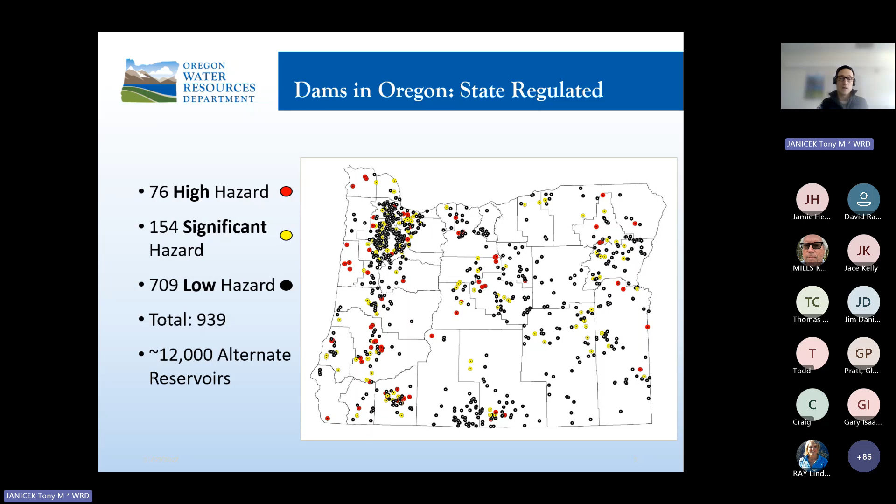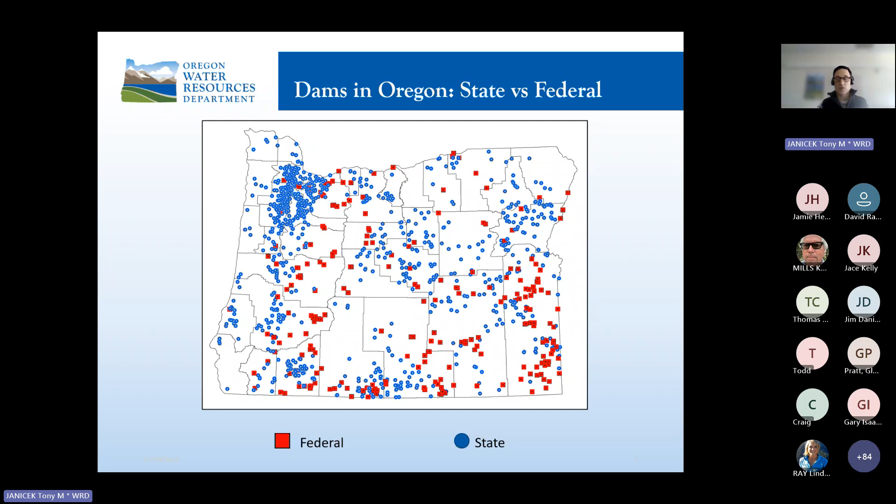This image, the map, shows the distribution of state versus federal dams in Oregon.

The dam safety program has 6 core functions. We inspect dams to identify safety issues, and following inspection, we follow up with an inspection letter that provides dam owners with recommended and required actions. We start out by trying to work with owners cooperatively to get those required actions completed. However, if a dam owner is unwilling to complete required actions, we have enforcement authorities that help get compliance. We also have a role in emergency planning and response.

This is largely around high hazard dams. All high hazard dams are required to have an emergency action plan, which is a document that tells what to do in an emergency, and they're also required to exercise those EAPs periodically. So we are fairly heavily involved with that. Even though significant hazard dam owners, and even to a lesser extent low hazard dam owners, aren't required to have an EAP, it is recommended that they do, just so that you're prepared in an emergency.

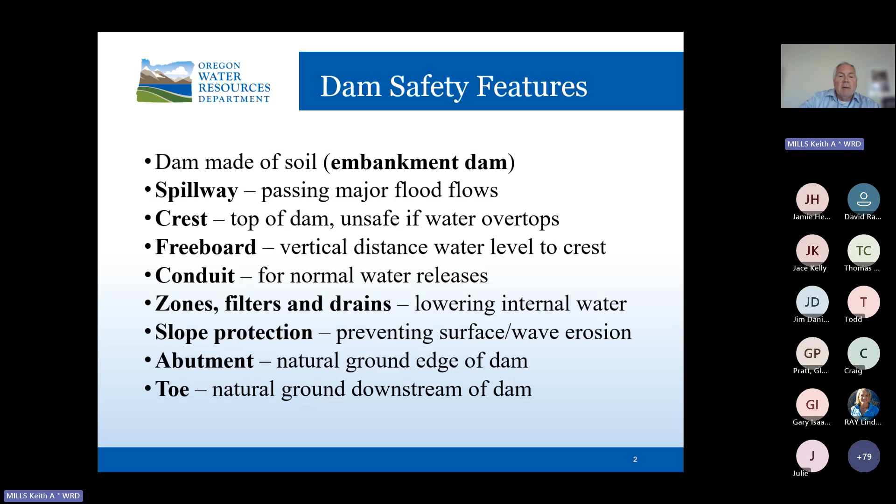I'll talk about slope protection for preventing surface and wave erosion, and show what those different options are. I'll show you the abutments of the dam, which is the natural ground edge of the dam, and the toe of the dam, which is the natural ground downstream at the base of the dam.

So here we have a dam, and I'll show you the main features. The crest of the dam is right here, and that's simply the top of the dam—it's not the top of the spillway. I once had an owner report that water was flowing over the crest of the dam, but they really meant it was just flowing over the spillway, which is a very big difference.

Here we have the abutments—they're the sides of the dam. This is one abutment, this is the other abutment. The toe of the dam is right down here. This is the downstream face of the dam, and this dam is covered with grass for its slope protection.

Then for spillways, this dam has two. It has what is sometimes called a principal spillway, which is sometimes this interior drop inlet spillway, and then there's a conduit that goes through the dam. A lot of dams do not have a principal spillway at the upper end—we do have a conduit through the base of the dam.

This is the outlet of the conduit, and then there's a valve typically on the top of the dam here, or sometimes there's a valve at the outlet works here.

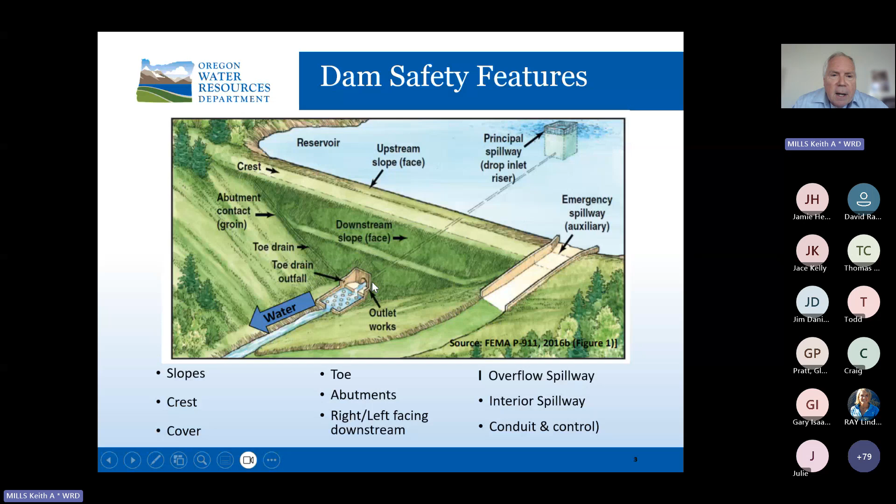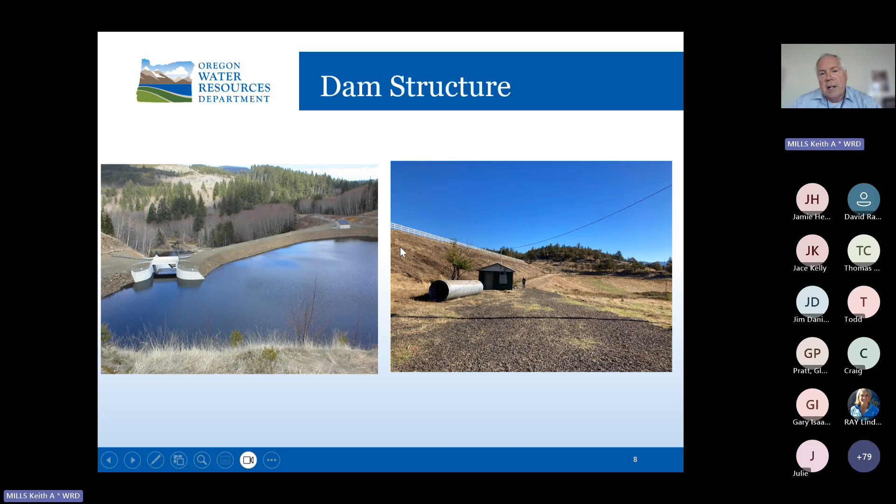This is another embankment dam that was just cleaned of vegetation. You can see the downstream face. This is their control building, where the outlet pipes are.

Now I want to get into the hazard rating of dams. Tony talked about that to introduce it, and I'll talk a little bit about why we have it -- it's based on the potential impacts from a failure flood downstream of the dam. That's very important; we're looking at what could happen if that dam fails.

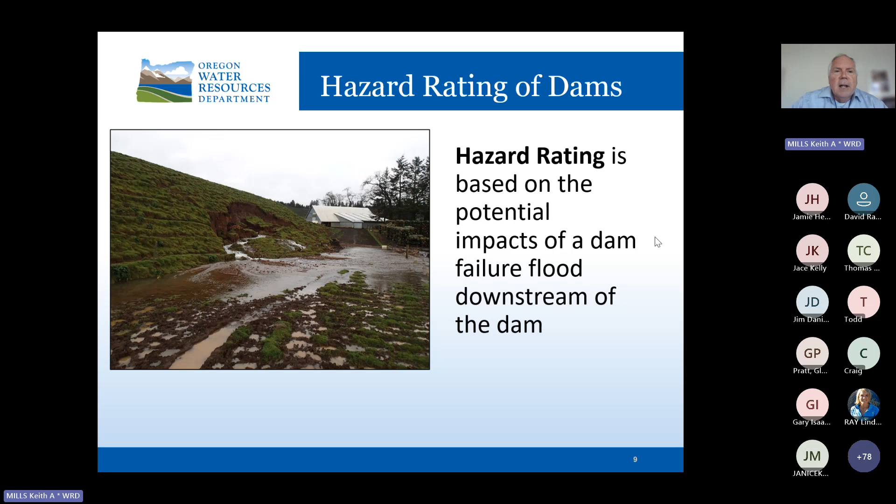Tony went over these, the hazard ratings for dams. High hazard is where we expect loss of life to occur if the dam fails, and that's defined in statute -- ORS is the statute reference, so statute is state law.

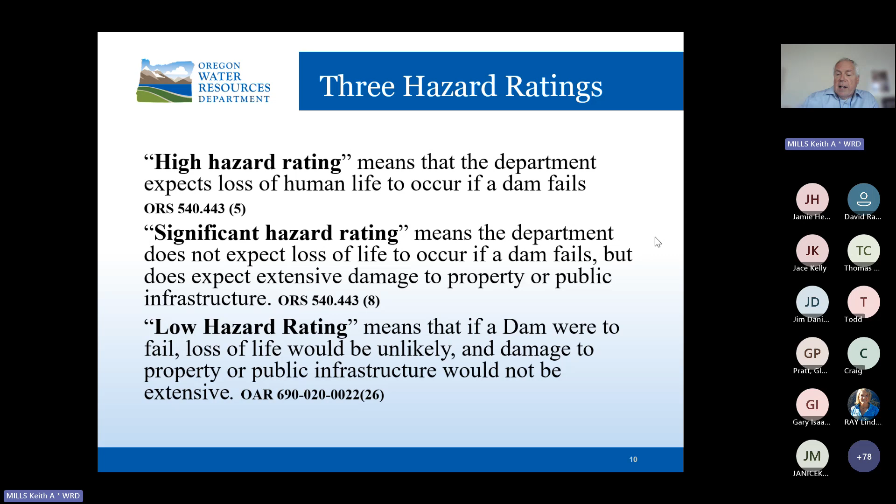Significant hazard rating means we do not expect loss of life, but we do expect extensive damage to property or public infrastructure -- that's also in law. Low hazard rating means that if the dam were to fail, loss of life would be unlikely and damage to property or public infrastructure would not be extensive. That's defined in rule, and those references are in the slide here.

So hazard is not risk -- I'll talk about risk later. Hazard, again, is what happens if the dam fails completely in a rapid failure. It refers to people, property, and public infrastructure, especially homes and busy roads.

Inundation analysis is required by rule for us to change the hazard rating of a dam, and for all new dams, the engineer working on that dam needs to submit an inundation analysis. What it is, is what's called a hydrodynamic analysis, used to determine the extent of flooding downstream of the breach, and also the depths and velocities.

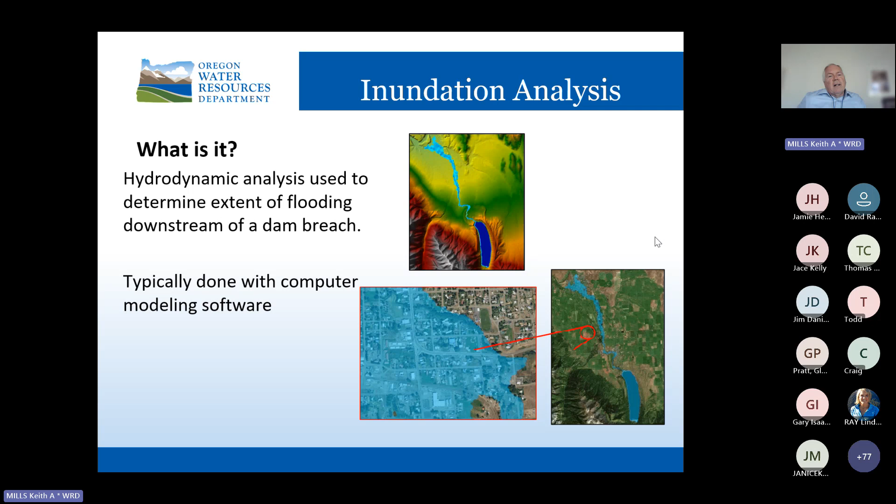It's done with pretty complicated computer modeling software. The one we use most is Corps of Engineers software. And then we get...

...maps like this, that include areas flooded shown in blue, and then flooded to 2 foot depth in the red. We look a lot at the 2 foot depth and velocity for our hazard rating change, especially for a high hazard rated dam.

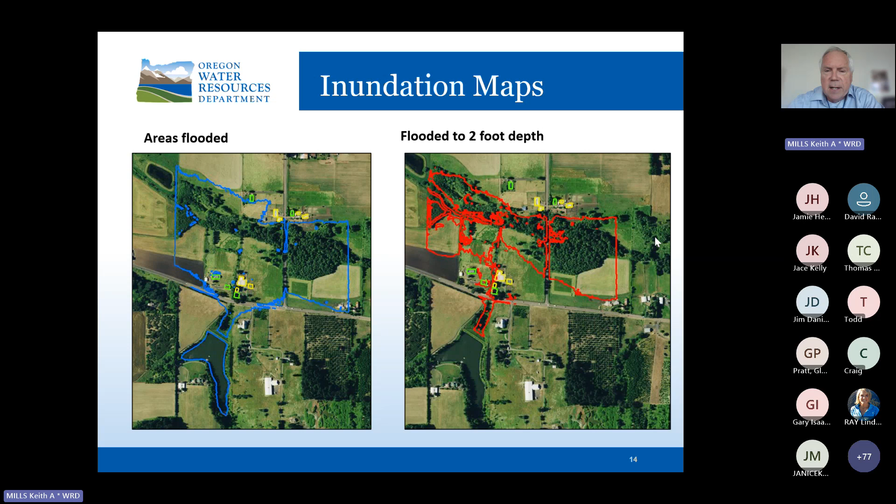What's based on hazard rating? This is important. So design standards for construction and modifications, the design flood, the design earthquake, and internal erosion prevention, the standards for each of those change based on the hazard rating of the dam.

So what's required for a new dam or for a modification of the dam will be quite different depending on the hazard rating. The inspection frequency changes too. We inspect high hazard dams every year, significant hazard every 3 years, and low hazard every 6 years.

And then for the annual fee, it's different for each of those hazard ratings. We also have a design review fee for new dams.

In terms of risk to dams in events, most dams fail in an event, and those extreme events may be floods, earthquakes, and landslides. I'll show a few of these in the next few slides.

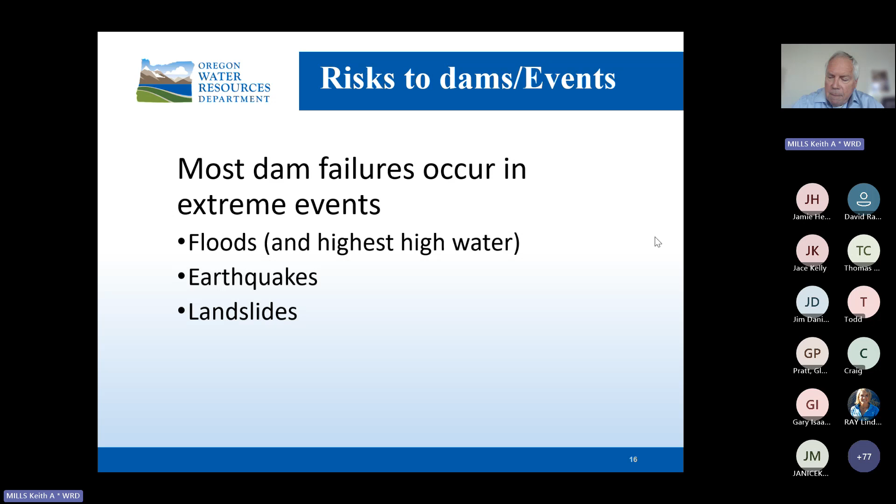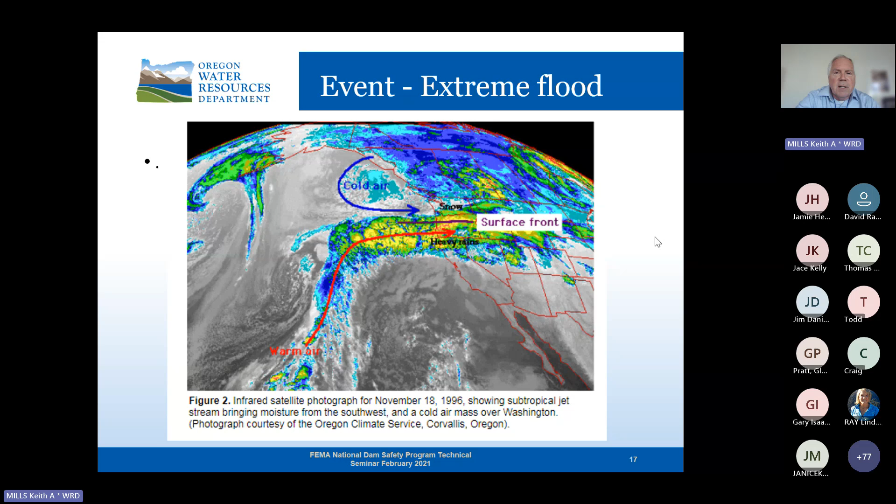So the first is an extreme flood. On this illustration, we can see the satellite image from a storm that hit Oregon in November of 1996. I was working for the Department of Forestry then, and it had very heavy impacts in Douglas and Coos counties, including a couple dams that got overtopped, but it also caused a number of landslides that had severe effects on people. So in Oregon, our largest floods have occurred in 1861 and 1903.

The 1861 storm was an atmospheric river up and down the West Coast. The 1903 event was an extreme thunderstorm. Many floods are expected during the life of the dam, and the dam needs to pass the largest flood flows without overtopping or other damage.

So again, as I talked before, the spillway is an essential safety feature. It's probably the most important safety feature on the dams, because dams made of soil fail if significant flows go over the crest of the dam.

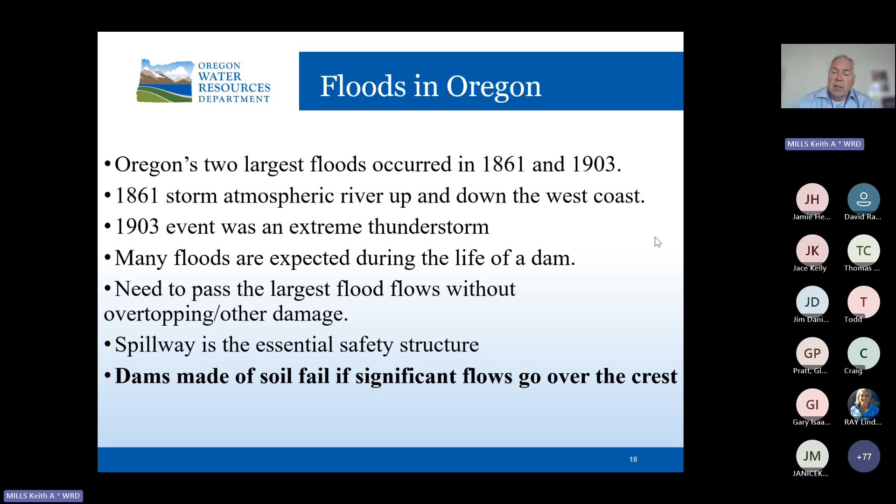This Cascadia subduction zone, when I went and got my second engineering degree in geotechnical engineering at OSU, that wasn't believed to make large earthquakes. It was thought to slip slowly all the time. Well, that's now known to be incorrect.

The last major earthquake occurred in January 1700, and there's an approximately 0.3% annual recurrence probability of this earthquake occurring. It'll be around a moment magnitude of 9. So that's our biggest concern in Oregon, but we also have a number of other smaller active faults in the Willamette Valley, around Klamath Falls, and also in Northeast Oregon.

And again, earthquakes cause different kinds of deformation in dams. So now those are the events that would cause dam failures, and now I'll talk about the actual failure causes.

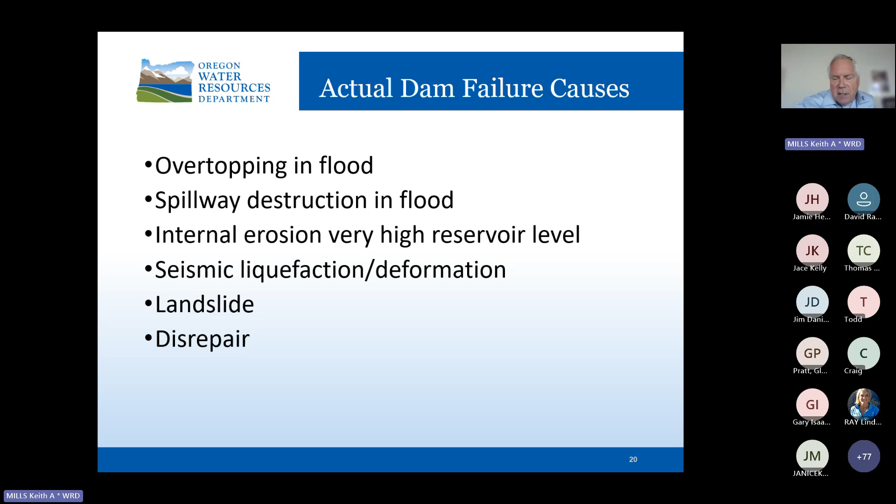The next one is landslides, and parts of Oregon are very susceptible to landslides. And the last one is disrepair of the dam. I'll just show a few examples of those.

Which was pretty amazing that this dam did not fail—sometimes luck is on your side. Then there's spillway destruction. About 7 or 8 years ago there was the Oroville Dam, which had major damage to both of its spillways due to some design issues. This is interesting because Oroville Dam is the highest dam in the United States, and it's in California, owned by the Department of Water Resources down there, but somehow they missed a few things. Luckily the dam didn't fail, but it resulted in 100,000 evacuations.

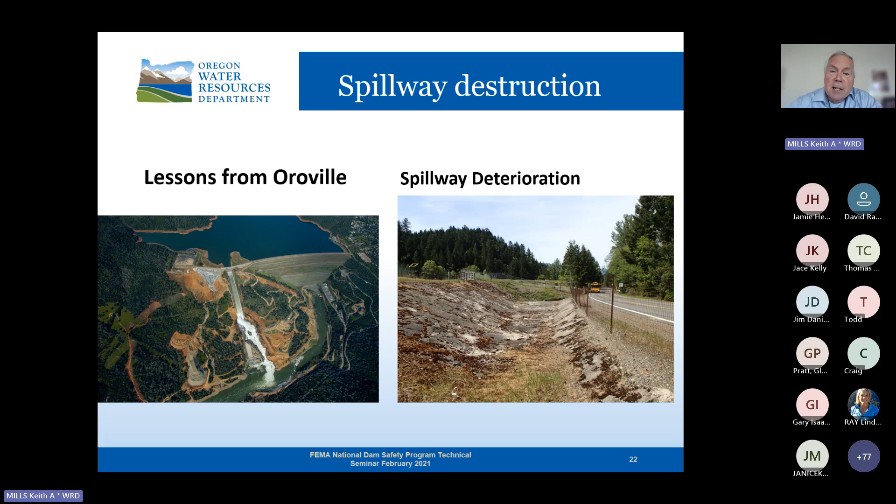And then spillway deterioration—we have a number of dams, including this one shown before, that have spillway deterioration. And then there's internal erosion. Teton Dam was the really big dam that failed in 1976 in eastern Idaho. This entire failure developed from the first seeps to the failure in 4 hours, including the rapid failure in about 15 or 20 minutes.

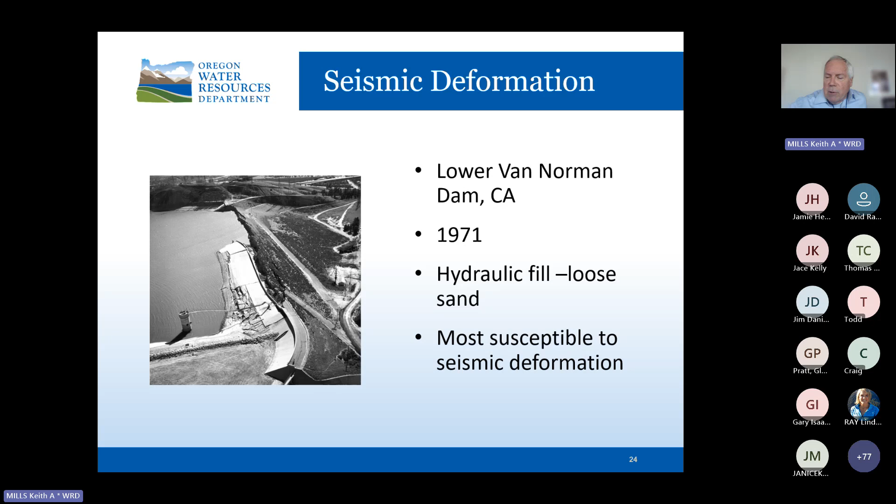And then seismic deformation. The example here is the Lower Van Norman Dam that failed like this in 1971. It didn't fully overtop, but the dam was destroyed. It was hydraulic fill with loose sands, which are most susceptible to seismic deformation.

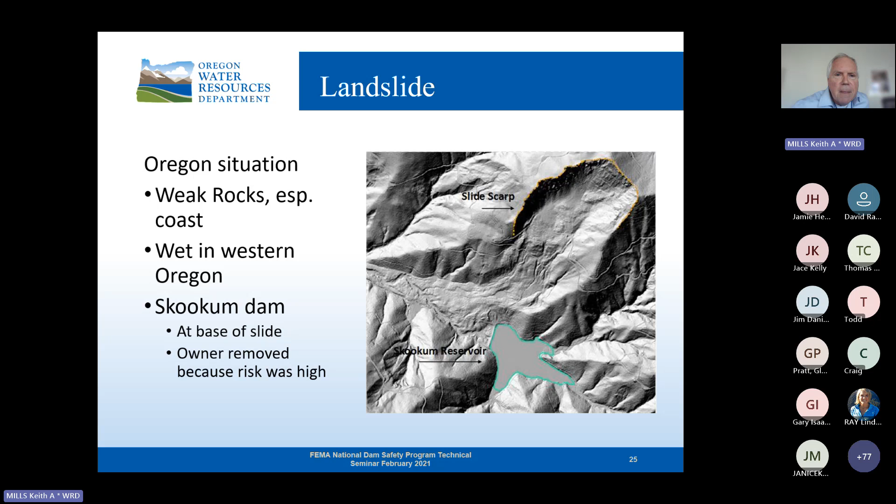So conditions that increase the risk of dams are undersized spillways, random and poorly compacted materials, corrugated metal pipes, and we did not know the Cascadia subduction zone and some other faults were active when some of these dams were built.

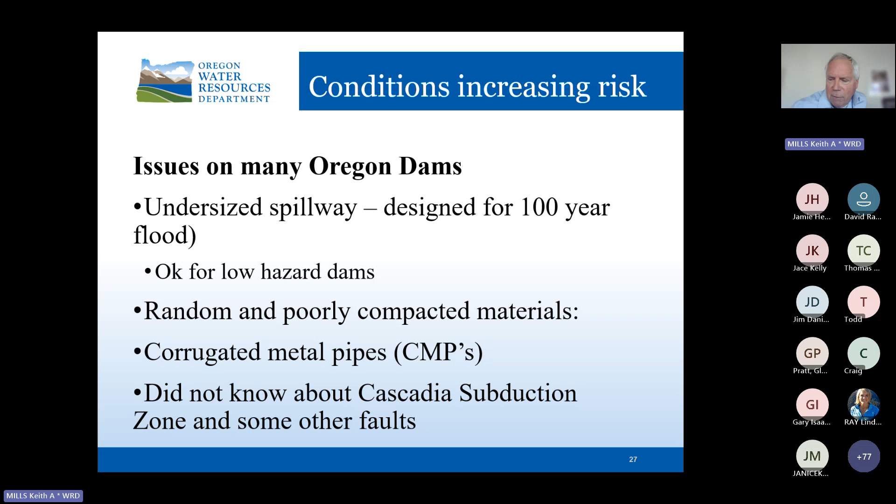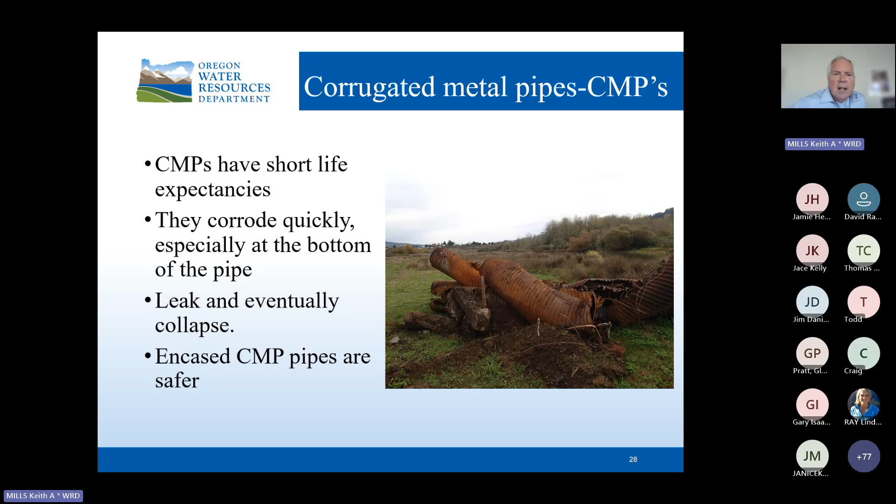Corrugated metal pipes are typically used in highways and logging roads, but they're also common in some dams. They corrode very quickly. These were pulled out of a dam—there's no bottoms in those. They leak and eventually collapse, which can increase the risk of dam failure.

We have irregular materials. This is a dam in Wheeler County near the Painted Hills, and the dam itself looks like the Painted Hills—it's actually supposed to. You can see the different colors here, and different gradations: gravel here, fine grain materials here. I'm not even sure what this is, but this was done to dig out the conduit through the dam, the corrugated metal pipe. They found that this dam had no core in it and was also irregular, so very prone to internal erosion.

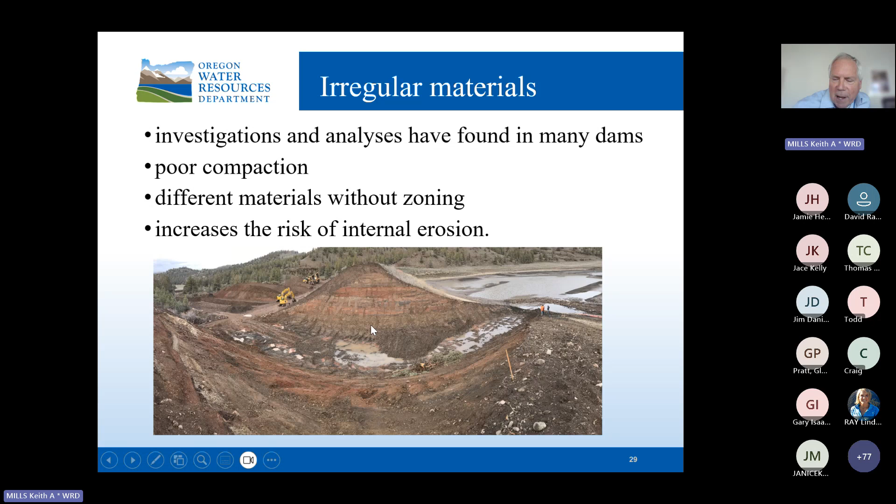One thing is that internal risk detection can be difficult, so we can't always find in our dam safety inspections what's going on in the middle of the dam. This requires, in this case, drilling through the dam. This dam was another where we found it was not constructed with the compaction indicated in the design—very soft soils in a very high seismic zone.

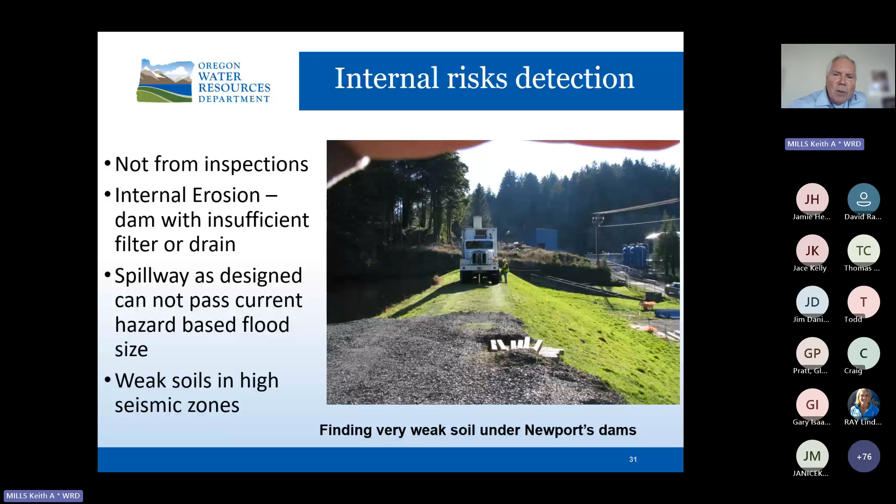Owners are working to try to find resources to replace their dams. So one option, if it's too expensive to rehabilitate and the water is not really needed, is removal of the dam.

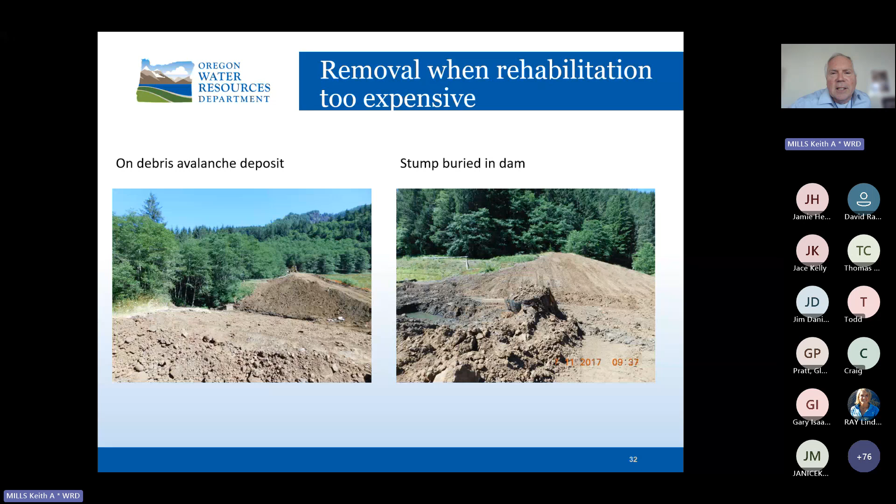And we learned a lot from removals. This is a dam in Tillamook that was removed, and this is a 6-foot diameter cedar stump that was buried in the dam. The dam had a lot of other defects that weren't shown on the drawing, so some of our dams were not constructed the way we would construct them now. But many dams in Oregon are well constructed and maintained.

So that's a brief introduction to risks of dams, and I would be happy to take any questions now.

Keith, would an overflow into a wastewater process be considered a spillway? I've got one above it too. Oh, and so I've got questions here. What kind of geotech testing was performed at the dam that was shown at Newport?

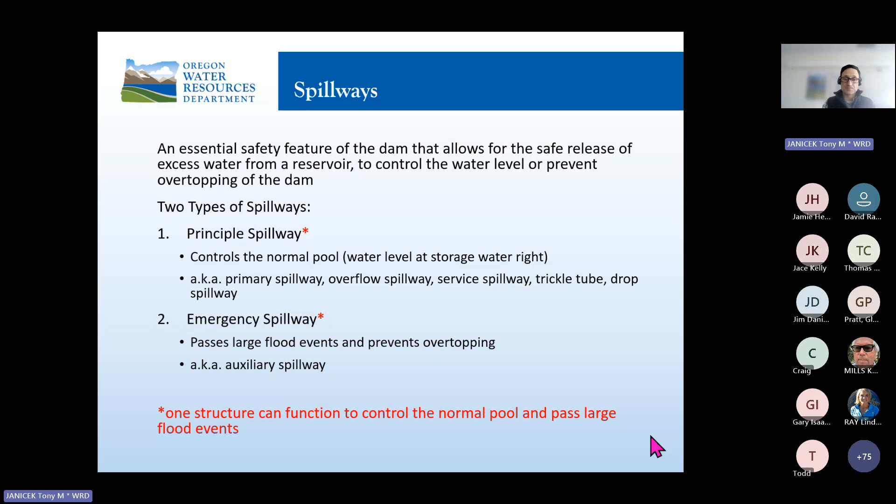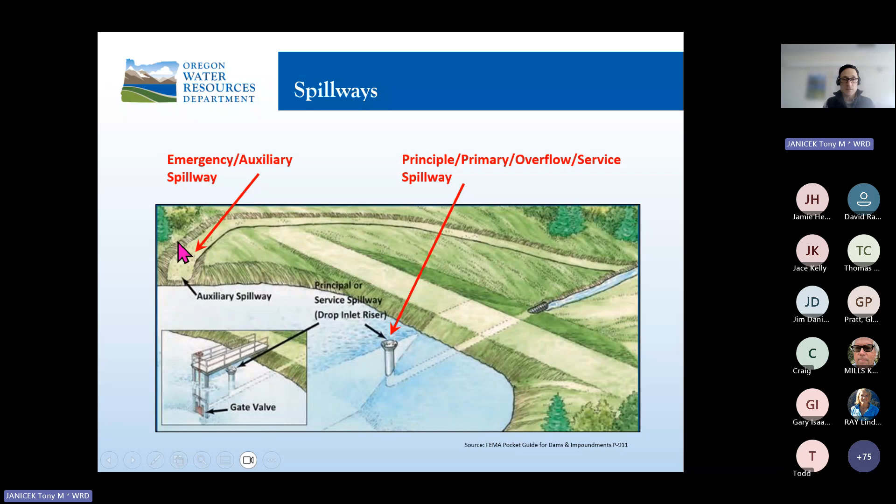This is just a configuration of the two different spillways on the dam. This is the principal spillway, and it controls the water level of the reservoir at this level. When a large flood event comes in, the water level rises and flows out the emergency spillway.

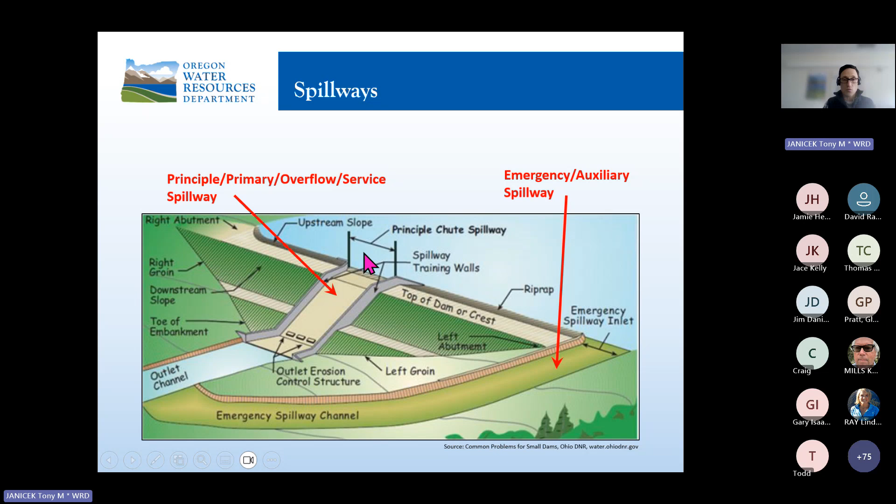This is another configuration of the two different spillways. This principal spillway goes over the top of the dam. Again, this one controls the water level, and this one releases flood water.

The control section is the part of the spillway that regulates the flow of water through the spillway. The dimensions and characteristics of the control section determine the flow rate into the spillway. Finally, the discharge is the part of the spillway that directs water away from the control section and away from the dam.

As Keith mentioned, freeboard is another important term when talking about dams and spillways. It's the distance from the water line to the crest, or top, of the dam. We have three different terms for freeboard. The normal freeboard is the distance at normal pool, so the distance at the bottom of the primary spillway, the invert of the primary.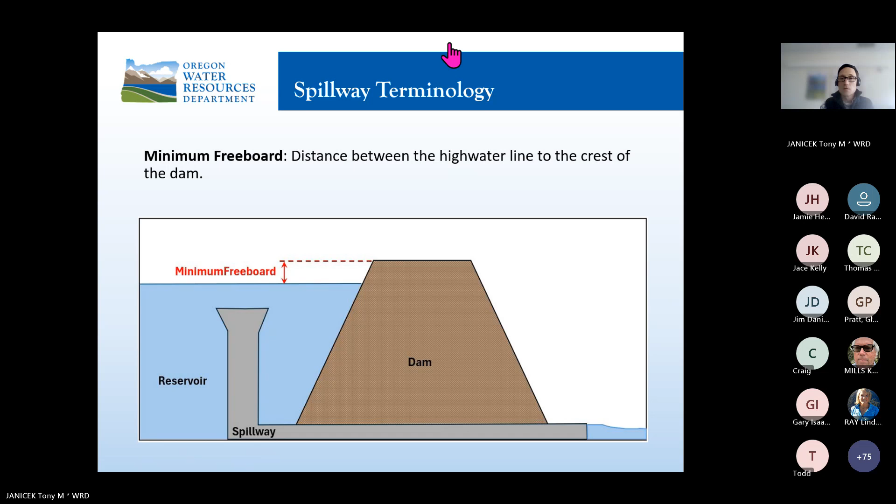Is it back? Is the audio back? Where did it cut out? Was it on this slide? Screen stopped. Let's see. Okay, we're back.

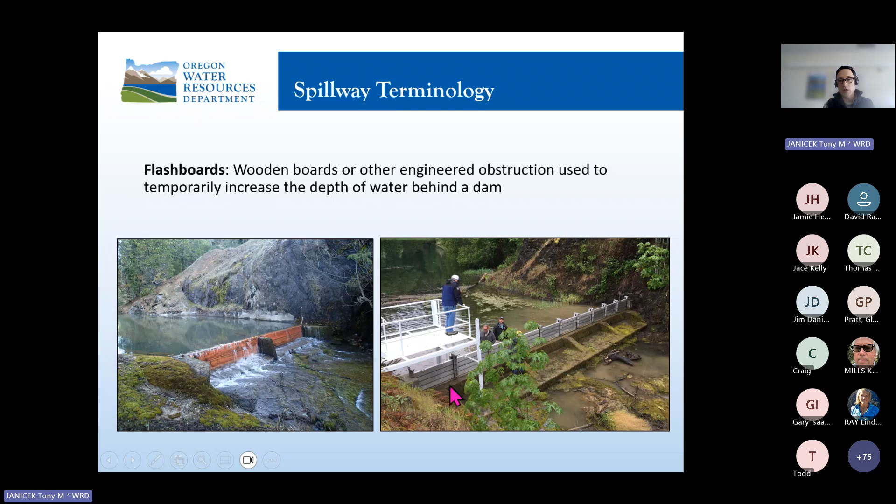As Keith mentioned, flashboards are another component of spillways. Flashboards are essentially an obstruction that temporarily increases the storage of the dam. Here, these are wooden flashboards, and you can see that with them in place, the reservoir level is higher than it would be otherwise. The picture on the right shows an engineered flashboard structure, made of metal.

Okay, on to spillway issues. A blocked spillway is any obstruction within the spillway that reduces or prevents flow through it. As mentioned, the function of the spillway is to pass large flood events, so if it's blocked, it can't do that, and the dam could overtop and fail. The cause of a blocked spillway is debris accumulation during flood events or after wildfires, or vegetation growing in the spillway.

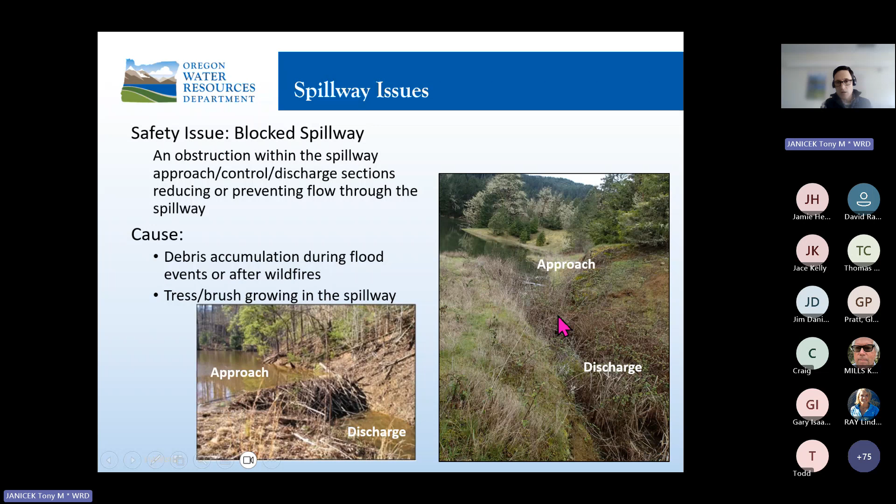The picture on the left shows a blocked spillway. The picture on the right shows a spillway filled with vegetation. It's kind of hard to tell, but here's the reservoir, and here is the discharge channel, and you can see the discharge channel is just filled with vegetation.

The other way is to just keep vegetation out of your spillway. This is a before and after picture, roughly from the same point of view of the same spillway. In the after picture you can see this well-defined spillway channel, but in this picture you can't even really tell what's going on because there's just so much vegetation.

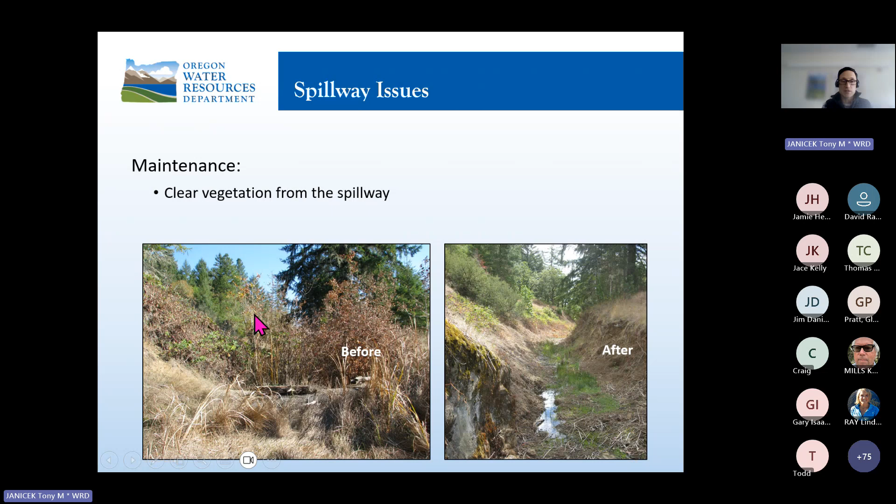Another safety issue is spillway erosion, which is degradation and damage of the discharge channel due to the force of flowing water. This is a safety issue because if erosion continues, it could eventually make its way back to the dam and cause a failure. At the very least, it would prevent you from storing water. The causes are a lack of protective cover—grass, rock, or concrete—or an obstruction in the spillway that concentrates water and facilitates erosion.

The picture on this slide shows the spillway. The point of view is standing on the dam looking down the spillway, so the water would flow from the dam in this direction, down. You can see the spillway—all sides and bottom—are eroding.

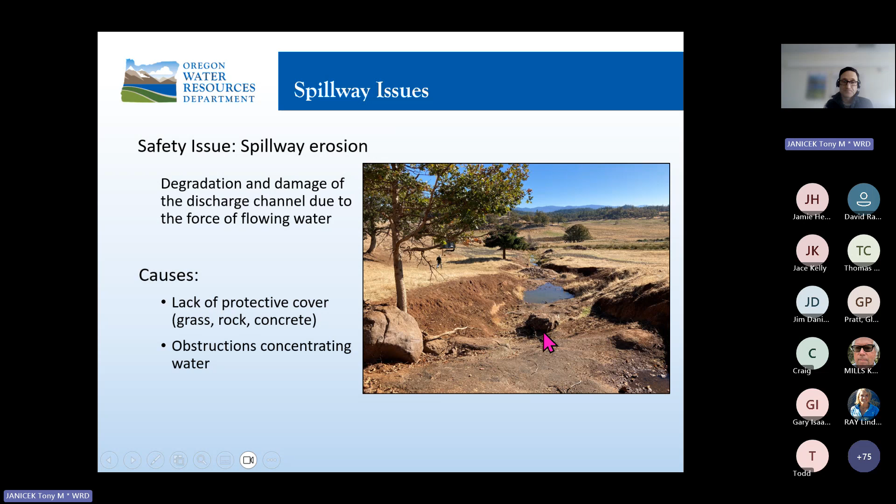On to the conduit. This was touched on a little bit, and I'm going to go into a little more detail. The conduit is an essential safety feature of the dam that allows the reservoir to be lowered in an emergency. It also allows you to release water to use it, but from a dam safety perspective, the key is that it lowers the level in an emergency.

There are two types of conduits: a low-level conduit and an intermediate-level conduit. The images here only show a low level, called that because it's at the lowest point in the reservoir. An intermediate level conduit would just be a conduit somewhere through the middle of the dam. A low level conduit is far more common than an intermediate level one.

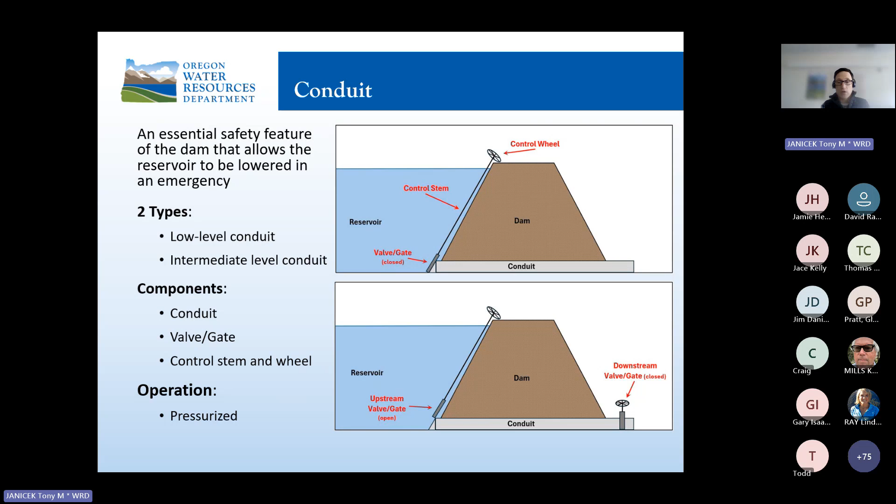Conduit safety issues: corrosion of the conduit and controls. This is largely due to age, environmental factors, and conduit material. The reason this is important is that if you don't have a functional conduit, if your gate's not working, you can't operate it to release water in an emergency. Also, if the conduit itself is corroded, as Keith showed in some photos of conduits with holes in them, that can result in internal erosion. Through those holes, water carries dam material away from the dam, and that could eventually lead to failure.

One of the most important things you can do is cycle your gate or valve annually. That means you fully open and fully close the valve or gate one time per year. It's important to note that if you haven't operated your conduit in more than a year, operating it may result in a sediment release, which could trigger a water quality violation. So if you haven't operated your conduit in more than a year and you plan to do so, you need to check with the Oregon Department of Environmental Quality to figure out the best time of year and any requirements associated with a possible sediment release.

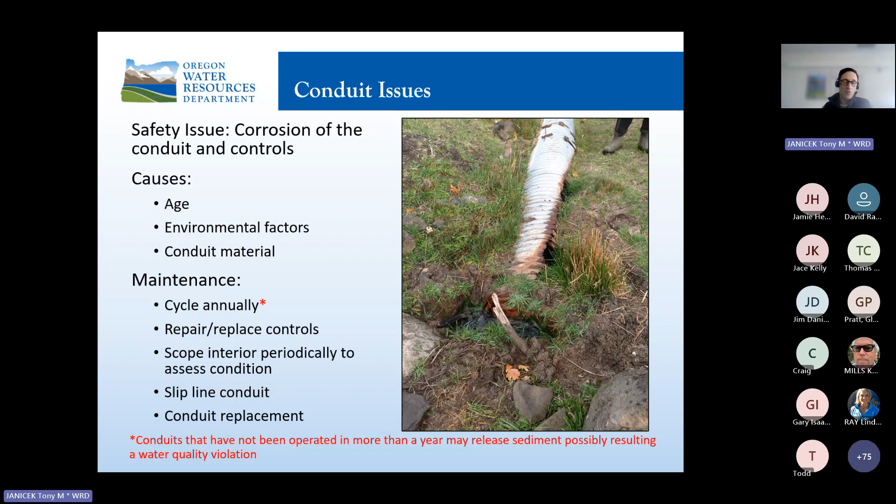Over time, because most conduits are metal, they corrode and deteriorate, and they eventually need to be repaired or replaced. For most dams, the lifespan of the conduit is somewhere between 25 and 50 years, depending on the age, environmental factors, and the type of material it is. I'll get into repair and replacement after this next slide.

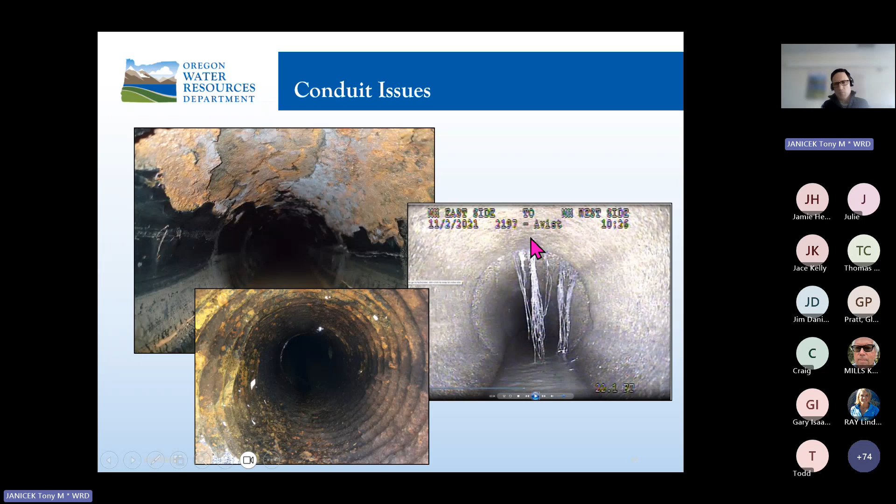These images show screenshots from different conduit scopings. You can see this appears to be a steel pipe that has corrosion here at the top. This is a corrugated metal pipe that has a lot of corrosion, and you can even see some holes here. This image shows a concrete pipe, two sections joined here at this joint. And this looks to be probably roots that are penetrating through the conduit.

As I mentioned, if you get your conduit scoped and it shows issues that need to be replaced or repaired, the repair option is called slip lining. That means a smaller pipe is stuck into the conduit and the space between them is filled in, grouted. In this image, you can see the original pipe here, and this is the new pipe being inserted into the conduit. Again, here is the original conduit, here is the new pipe that's been inserted, and this here is the space in between that has been grouted, typically with some type of cement-based material.

It's important to note that slip lining is not possible in all cases. Sometimes conduits can deform, and if they deform enough, you can't actually get another pipe inside. In other cases, the original conduit is just too small from a dam safety perspective to have another pipe inserted inside. In those cases, the conduit needs to be replaced, meaning the old one needs to be dug out and removed, a new one installed, and then the dam rebuilt.

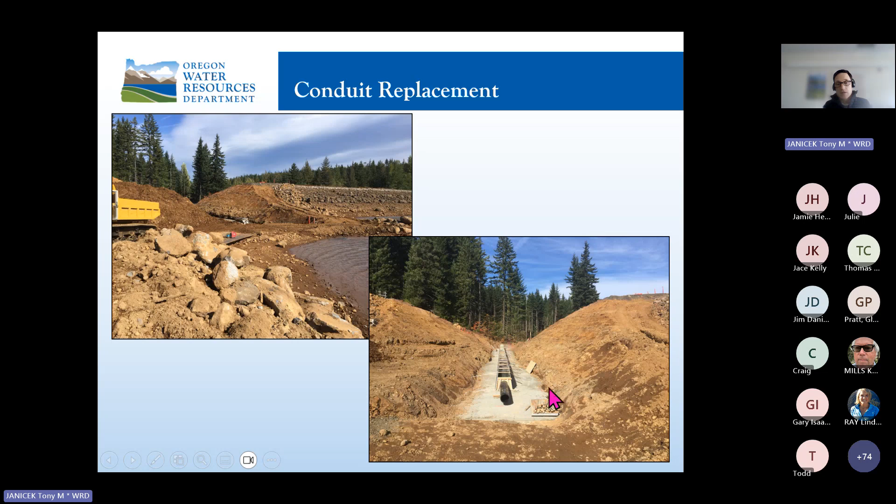Here you can see this is the dam. It extends all the way through here, and they dug out essentially a V shape, which you can see here. The old conduit was ripped out, and this is the new conduit that they're working on installing. Once they install this, they're going to build the dam back up to the original height.

Another safety issue related to conduits is erosion at the conduit outlet. This is caused by the force of water and lack of energy dissipation.

You can see here, this is just minor erosion. But all along here, material is being eroded, and over time that will get larger and begin to cut back into the dam. The dam is back this way. The reason it's a safety issue is that as it cuts back into the dam, it can cause issues with seepage, internal erosion, and stability.

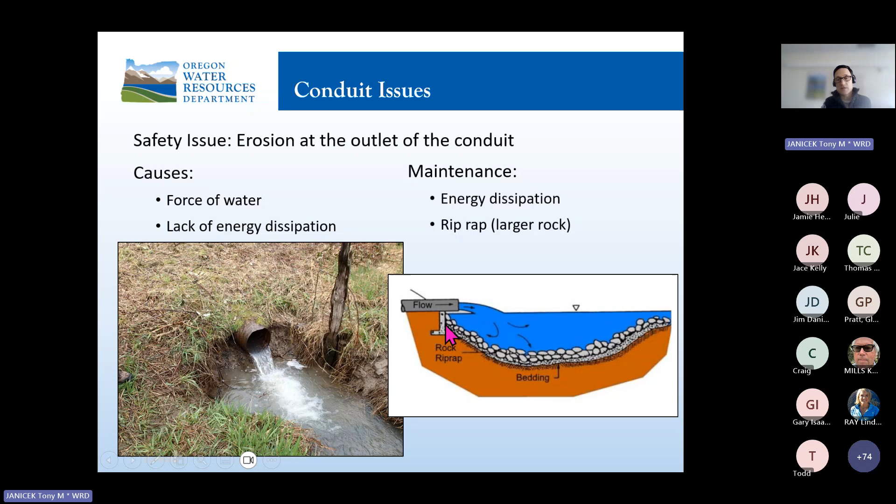So how you address that is you need to add some type of energy dissipation. Essentially that's just lining the outlet with rock. You can see in this image a small pool is created and rock is placed on the bottom, which dissipates the energy and prevents further erosion.

And with that, I'll open it up to any questions on maintenance of spillways and conduits.

Do you have a camera to inspect conduits during annual inspections? We do not currently have a camera. We plan to apply for grants at some point, probably in the next few years, to try to get one. That would be the ultimate goal. But as of now, a private company needs to be hired to do that.

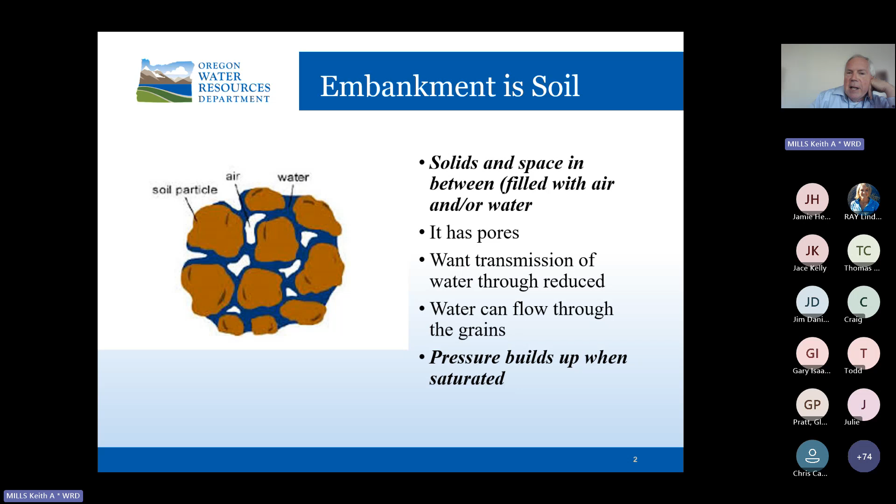What we do to make soils behave better as a dam material is to compact it. If we don't compact sufficiently, it's more prone to leakage and a higher risk of sliding - it's weaker. If it's compacted too dry, we have potential for cracking of the material and internal erosion developing through the dam. So compaction, when originally constructed, is very important.

Why this is another feature of the dam I talked about earlier is zoning. Zoning means there's different types of material used in different parts of the dam. This dam has an impervious core, finer grain, more clay-like material in the middle. Then these are what we call the shells, the upstream and downstream shell, which should be more open, better draining materials.

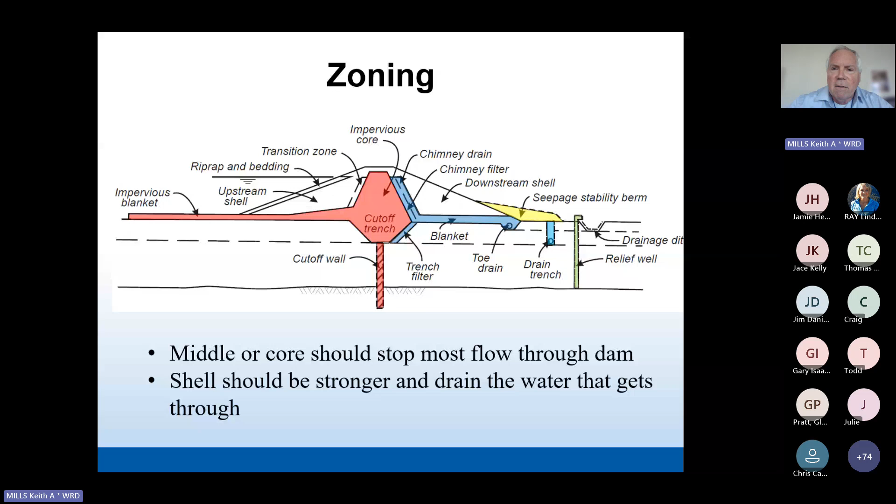On many of our dams, in fact most of our older dams, are homogeneous dams - sometimes they say they have a core. A homogeneous dam has the highest risk of internal erosion. There's no safety features for controlling internal erosion should that develop.

This is a slide from that dam in Tillamook. This dam's drawing shows that there's supposed to be a core right here. Well, there's no core that we can see. You can see a lot of cobbles in this material. Then we have a change in materials right here around the conduit and wetter materials down there. So it's more like a lot of our dams are a random fill.

When I started, I worked for the Department of Forestry for 27 years before I started working for the Water Resources Department, and I wasn't informed that some of our dams would look like an old logging road fill. So that was kind of a surprise.

We haven't seen that many internal erosion problems on some of our dams, but it does make up about half of the 50 or so failures that Oregon has seen since we've had a dam safety program. So it's pretty significant that some of our dams don't have these safety features.

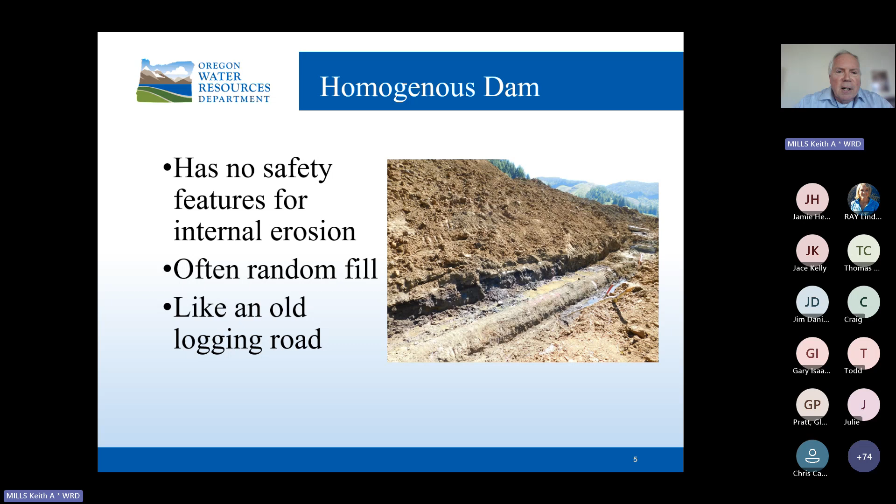So it's important to look at those pretty frequently to see there are no new seeps or other signs of internal erosion. So what is internal erosion? It's flow through or under the dam, through the soils of the dam or the foundation of the dam. Because those soils have some porosity, if they're saturated, there's water flowing through that.

That water flowing has a seepage force, and it can move particles and eventually develop a piping hole. If the material above it is strong enough to form a roof, that can progress to a pipe completely through the dam, like the Teton Dam failure and other failures. What happens for failures is that pipe enlarges and the top of the dam collapses, and then we have a failure. So we do see some signs of internal erosion that we can see during inspection.

So one is an increase in seepage with a hole, and that's the photo on the left—a dam that the owner has modified. Tony showed a picture of that dam, and it's been raised and now has a filter on it, treating where this internal erosion developing hole had developed.

The figure on the right is one of our former water masters, and she's in a sinkhole on a dam—it's up to her elbow how deep that sinkhole is. There were a few sinkholes on that dam. The owner chose to remove it; we found no easy way to repair it, and it was a high hazard dam.

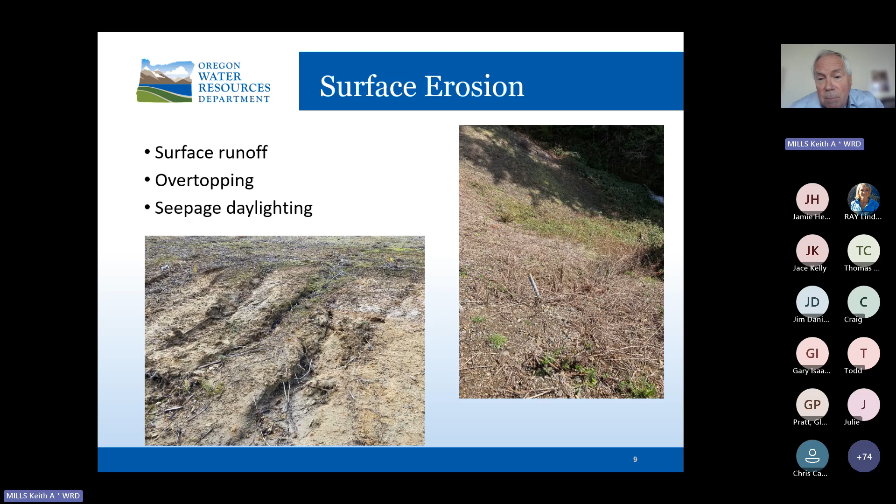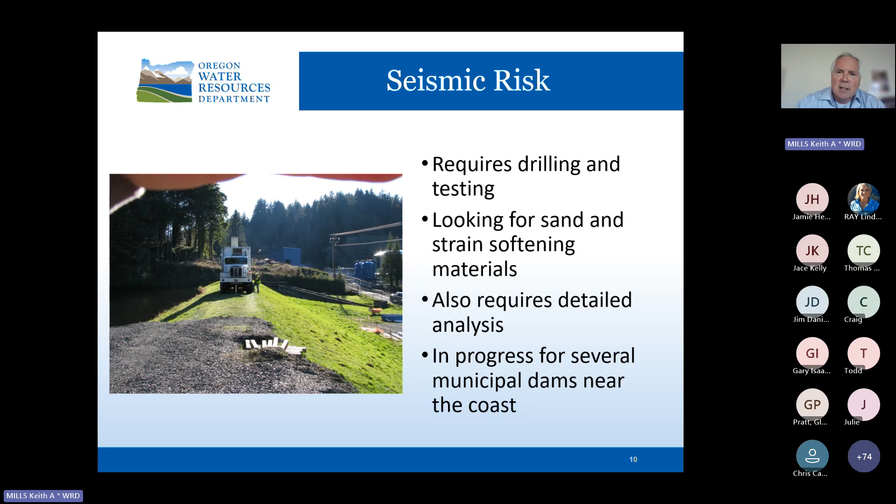I'm going to switch gears now to plants and animals and why we're concerned. Plants and animals can damage embankment dams. Western states have experienced dam failures caused mostly by animals, but a few by plants.

We've had a number of dams in Oregon that have failed due to animal burrows or dens in the dam. Dams can provide animals food and cover, so they can be a great place for animals to live if they have access, and they also provide a place for burrows and dens.

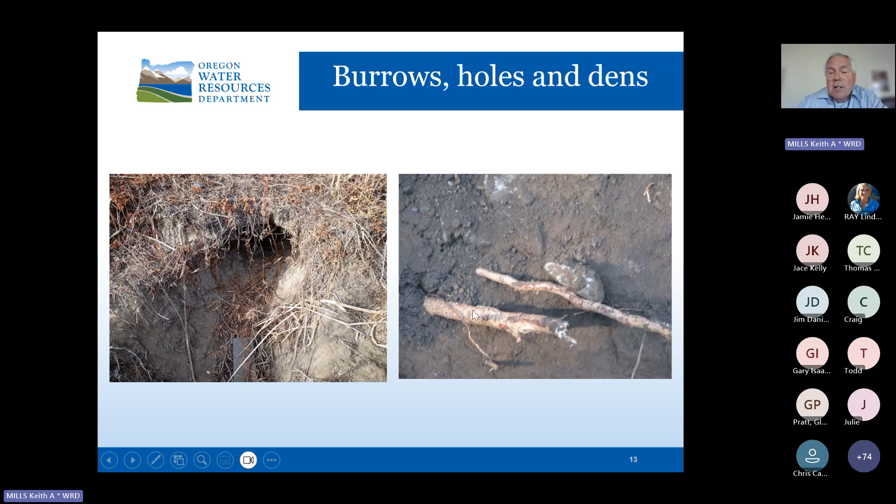We have burrows, holes, dens, and roots. Here's a big badger burrow—in this case the badgers were going after squirrels. And these are roots that are 60 feet away from a tree and 1 inch in diameter—ponderosa pine roots.

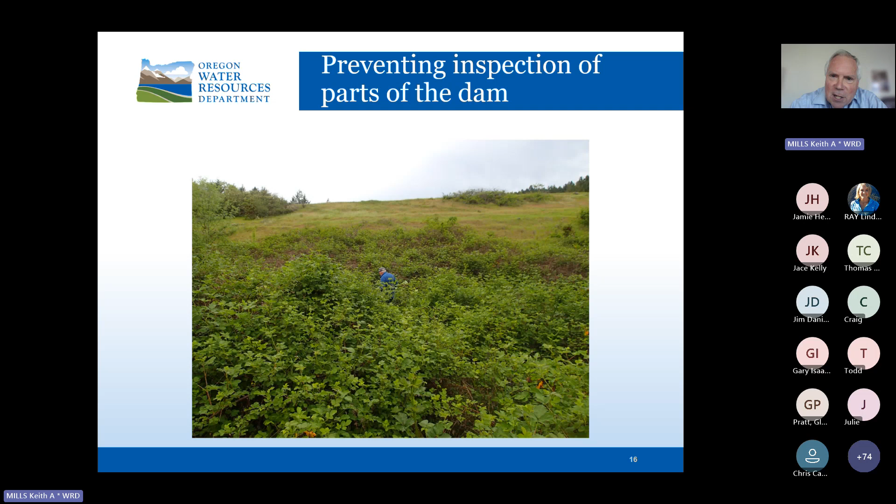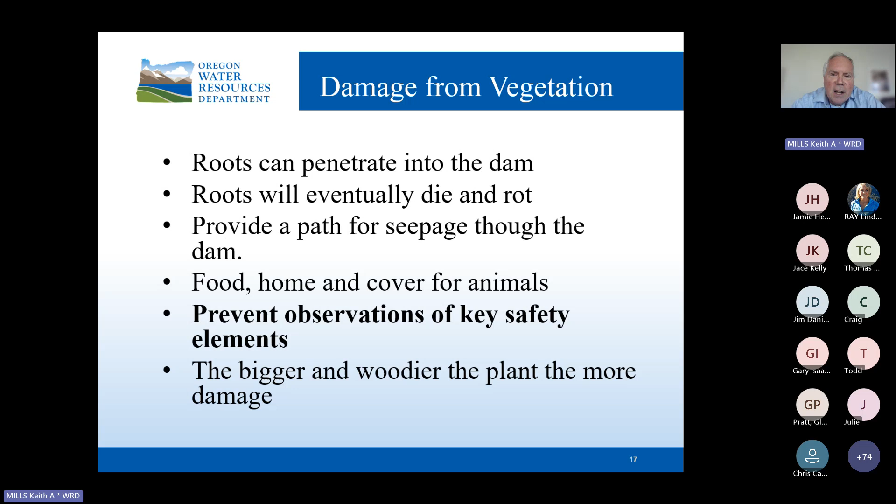In many cases, we just won't do that until the vegetation is cleared. It's just not safe. So damage from vegetation - roots can penetrate the dam. Roots will eventually die and rot, and when they do that, they can provide a path for seepage through the dam. The vegetation also provides food, home, and cover for animals. They prevent observations of key safety elements, and the bigger and the woodier the plant, the more the damage.

So the roots, this is a ponderosa pine example. You can see the ponderosa pine here. This is an excavator because this dam leaked due to animal impacts. This is 60 feet away from that ponderosa pine, and the roots went all through there - there were 1-inch roots there. So ponderosa pine especially can send roots a long distance.

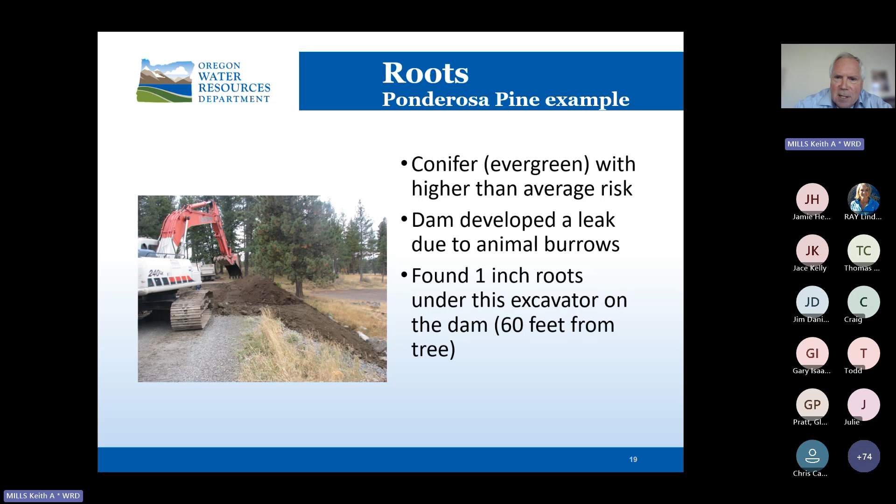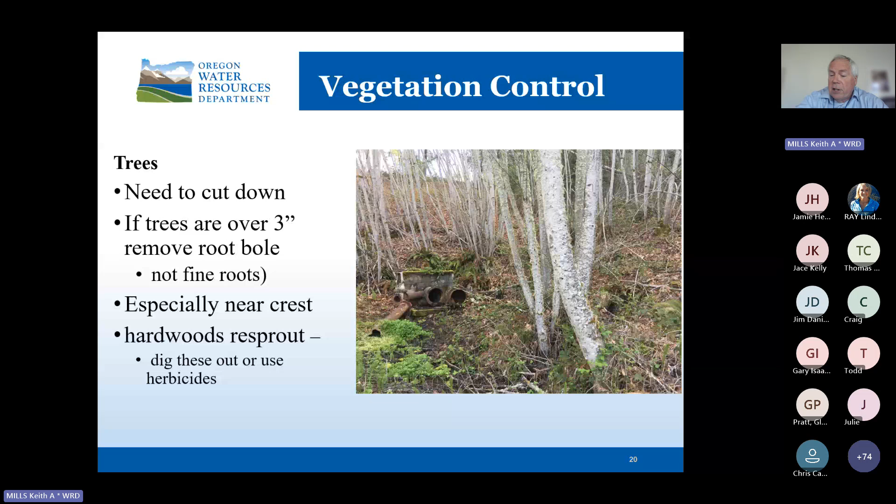And then these are big leaf maples covering the downstream face and around the conduit. These need to get cut down. If the trees are over about 3 inches in diameter, it's important to remove the root bole, but not the fine roots. They are especially dangerous near the crest. In this case, they're near the toe of the dam. Also, there's some on the crest, but these are big leaf maples. If you cut these down without digging out the full root ball or using an herbicide, they're just going to resprout, and these have already resprouted once or twice.

Then for vegetation control for woody brush and also for vines, in Western Oregon typically brush gets cut once a year. Eastern Oregon, not so often - can be at least every few years to be sufficient, since they grow slower. It must not prevent observation of the ground surfaces, and the brush must be removed if it's providing cover for burrowing animals.

And then the next best ground cover is grass. Grass can be a good erosion control measure. You can cut it by mowing, or if the slope is too steep, by weed whacking. The main thing on grass is we need to be able to see the surface, or at least changes in color of the grass, for our inspections to see if there's any seepage. You want to protect this - if you're treating with herbicides, the goal is not to kill the grass, but to just control the other vegetation.

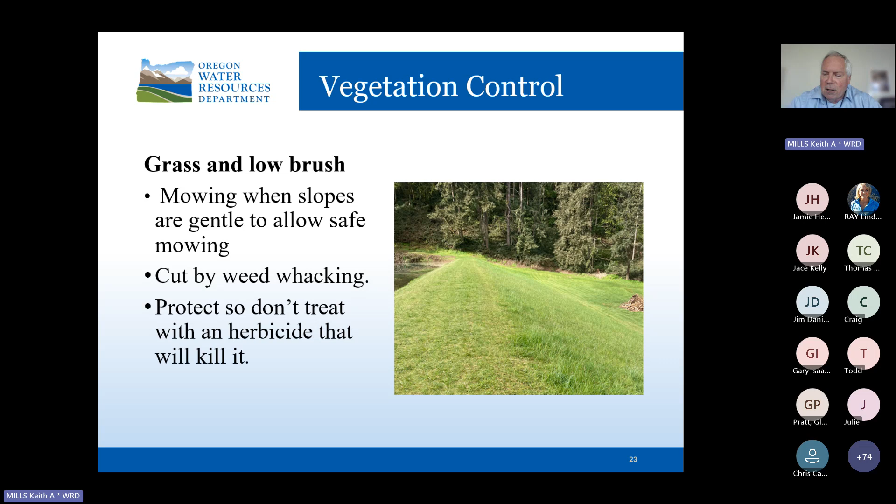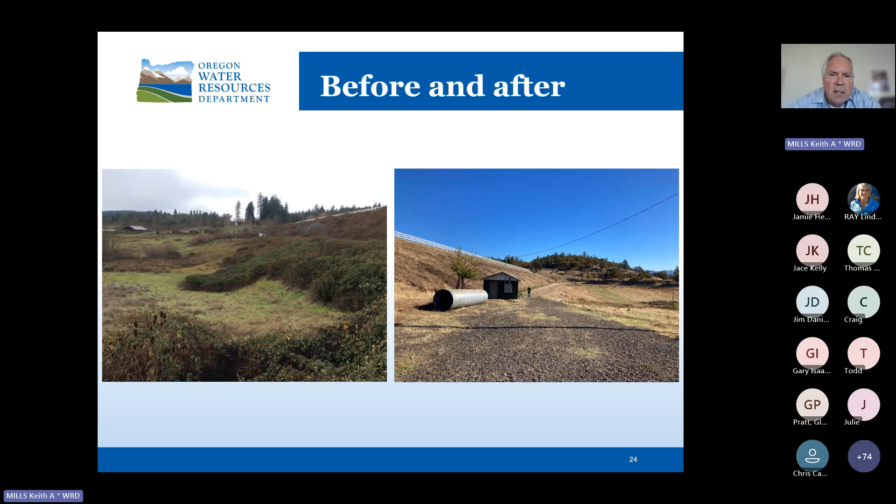So this is an example of a dam in Jackson County, before and after, and the owner did a really good job removing vegetation from this dam. That's what we like to see, and still maintaining a grass cover.

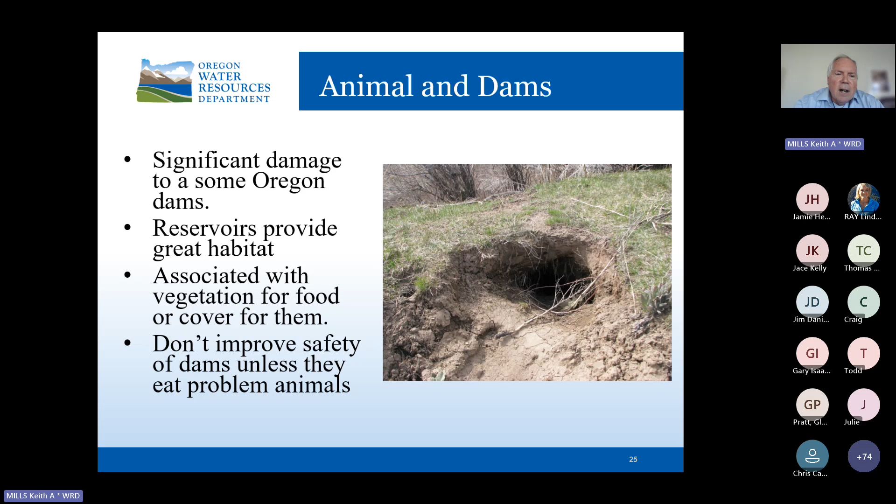Now switching to animals and dams. Animals provide more significant damage to some of our Oregon dams. Reservoirs provide great habitat - they are associated with vegetation and food and cover for them.

In terms of damage that I've seen on dams, these are the order of impacts I've seen: nutria first - they're just in Western Oregon - cattle, muskrat burrows and dens, beavers, ground squirrels, badgers (usually after squirrels or other rodents), and marmots and rock chucks.

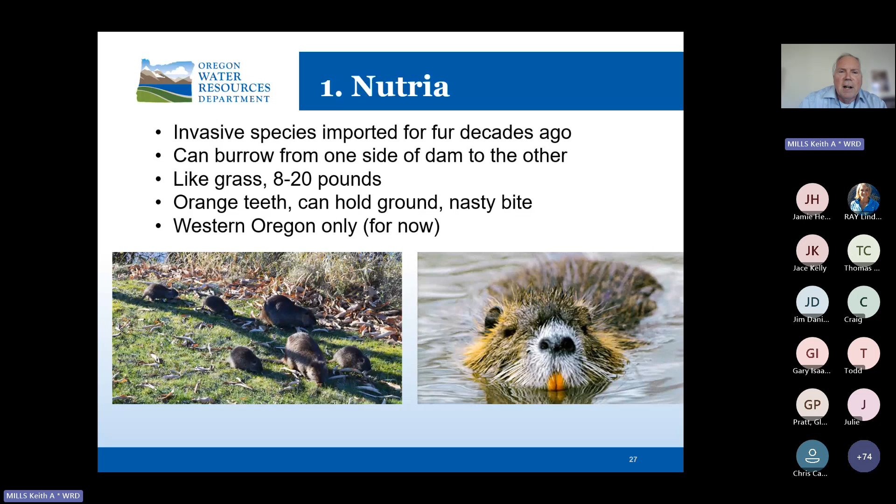So the nutria - that's just a picture of nutria. The big thing about nutria is its orange teeth and size, about 8 to 20 pounds. They were imported as a fur species, and they can be dangerous around small to medium-sized dogs. They do a lot of damage - I've seen them burrow from one side of the dam to the other, clear through a dam. Yeah, a lot of damage.

They go on the dam to eat the grass growing there. So grass cover, when there's cattle, attracts the cattle.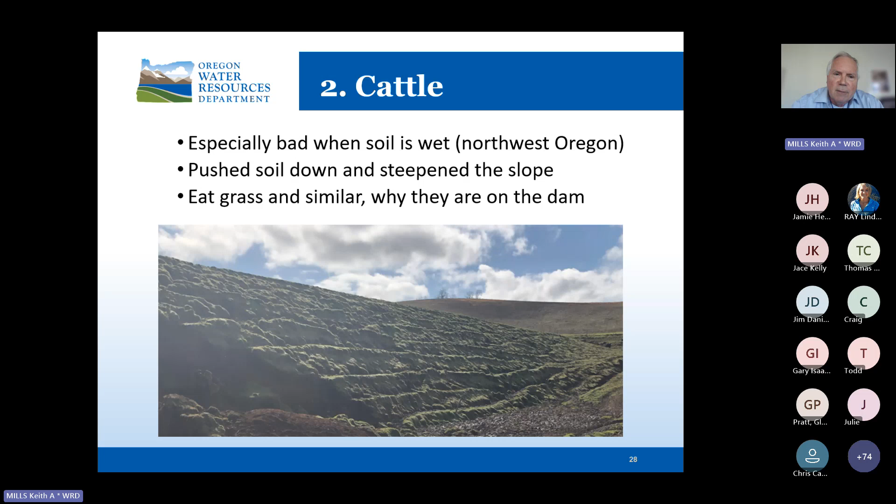Beaver are big, pretty easy to spot with a big flat tail. They can dam the spillway and entrance to the conduit and really burrow into dams, causing a lot of damage.

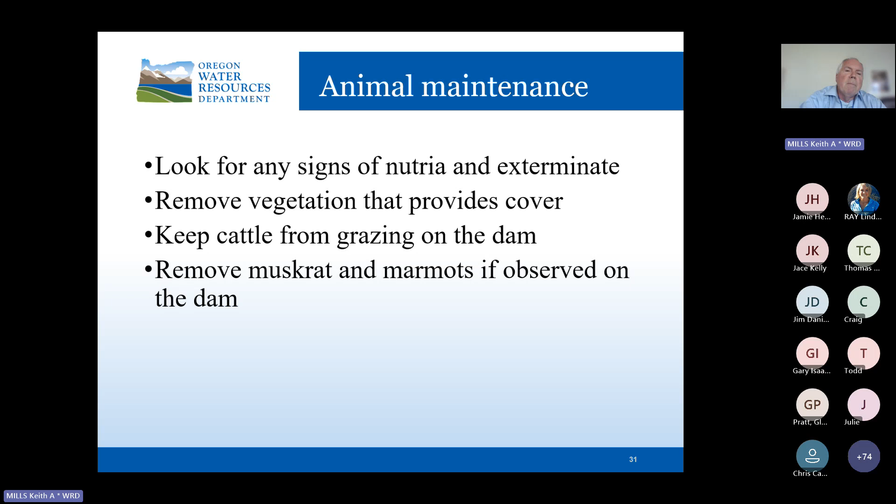For animal maintenance, look for any signs of nutria and exterminate those. Remove vegetation that provides them cover, keep cattle from grazing on the dam with fences or whatever else it takes, and remove muskrat and marmots if observed on the dam. Remove ground squirrels if the burrows are widespread. Remove beavers if they have placed any material in the spillway or burrowed into the dam.

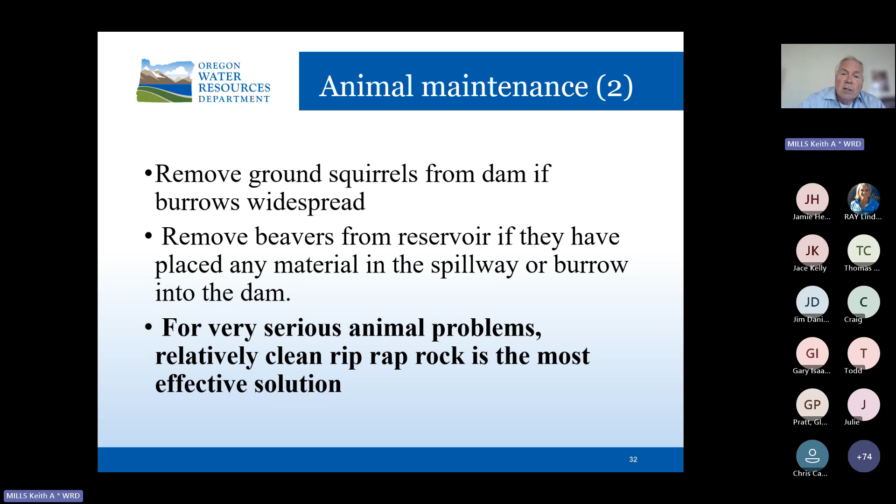If modification is necessary—say for a leak from a burrow or den, or from slope failure, a large tree, or burrowing into the core area—excavation into the depth of the damaged fill needs to take place, and the fill compacted to the correct density and moisture content. That is considered a modification of a dam that requires approval.

Any questions now on soils in the dam, plants, or animals? I'd be happy to take those. There's two in the chat right now. Okay, let's see the chat.

Is there a rule or standard on how to correct animal burrowing damage? I normally don't consider it damage until it's a few feet into the dam, unless it's very close to the crest, since that's the shell of the dam. Once you get deeper than that, you want to find out how deep it is, dig it out to that depth, and recompact that fill. If there's a large tree on the dam over three inches, dig that out with the big roots, leave the finer roots, and compact that in. That's just a general rule of thumb—each animal is different, and if our engineers inspect it, they'll probably look at the specific situation and give you a little guidance.

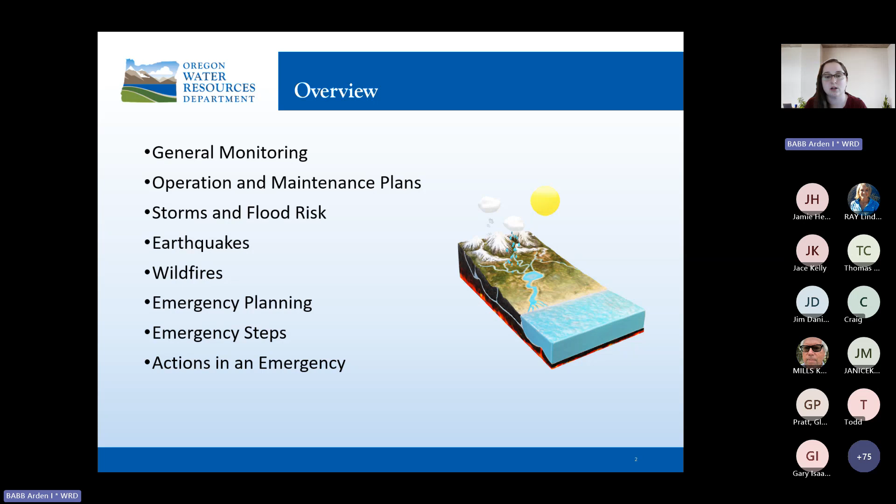Steps you can take in an emergency if one were to happen, and then actions in an emergency, which sounds similar, but I'll differentiate those when we get through them.

In general, monitoring, you're going to want to monitor the items that Tony and Keith have previously talked about. That includes internal erosion. A couple more examples of what you might look out for: you could have areas called sand boils, basically material that's starting to move up through the dam and create puddles of material. You can also look for erosion on the dam itself, as well as sinkholes and other options that Keith mentioned earlier.

The biggest thing we always recommend is to look for any changes, things out of the ordinary, anything unusual. Most owners see the dams a lot more frequently than we do, so you guys will be familiar with what's normal daily and what's changing week to week or year to year.

You want to keep an eye out for any new or increased seepage that you might be seeing—I'll show a couple examples of what that might look like on a dam—new animal activity, any trails near the water, burrows, vegetation being eaten, things like that, and any cracking or settlement or sinkholes that you guys might see on your dam.

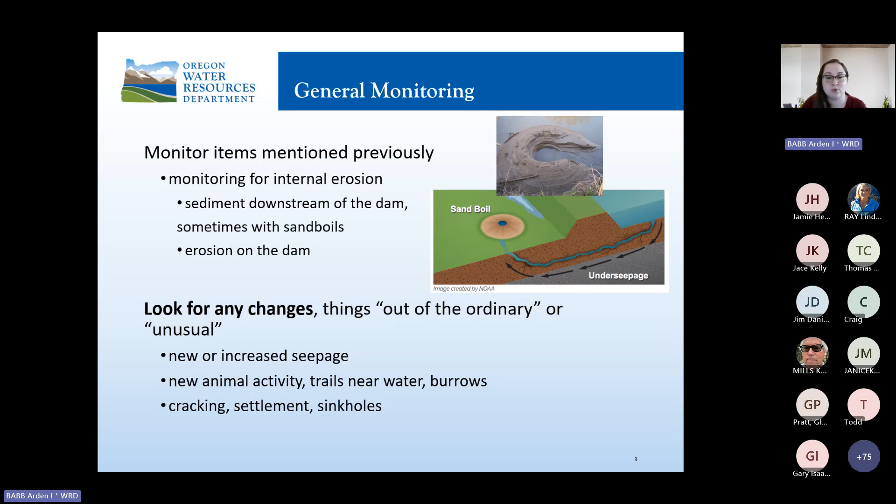Sometimes this is a standard—these might look the same year to year on every dam—but if you're seeing new vegetation or new growth that you normally wouldn't see, that might be an indication that we need to take a closer look at those areas.

Another example showing a more extreme event of seepage progression. In the top image here, there's a fairly clean dam face, but you can see there is quite a lot of water behind the dam. You can see water starting to flow through the material, and that actually led to a failure of the slope.

Again, this is a worst case scenario. Most of the time you're not going to see this, but it's an example of why, if you start to see extra moisture or additional seepage on your dam, it's important to notify us and potentially work to get that repaired.

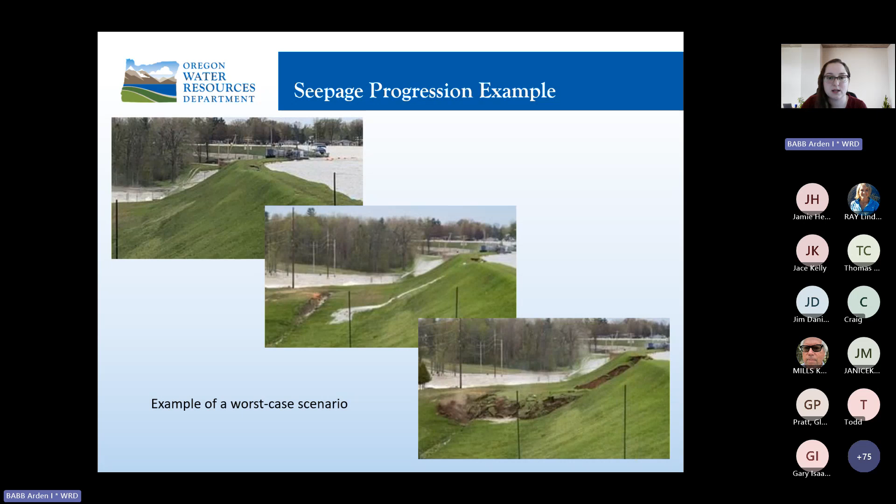One way you guys can help yourselves prepare for an emergency or just keep your dam in good working condition is with an operation and maintenance plan. Operation and maintenance plans are required for high hazard dams. We will review those and work with you to make sure they meet our requirements.

But some new significant or low hazard dams might also require them. We highly recommend formal plans just to keep on the property or with anybody who would be utilizing the dam, because they include elements that will help you maintain your dam moving forward. Some examples of what might be helpful to include in an operations and maintenance plan, even if you're not required to have one...

Procedures for operating your valve and lubricating it on an annual basis. Some standards for how to manage vegetation. That might just be notes that were, for example, provided by Keith earlier. It could be monitoring to ensure the dam faces stay clean, conduits and spillways are clean as well. Routine observations, so frequency of monitoring seepage, any deformations, general condition. This could also include normal seepage conditions. Most dams have water going through them, embankment dams to some degree, and as long as they're consistent and monitored well, then those are fine for us.

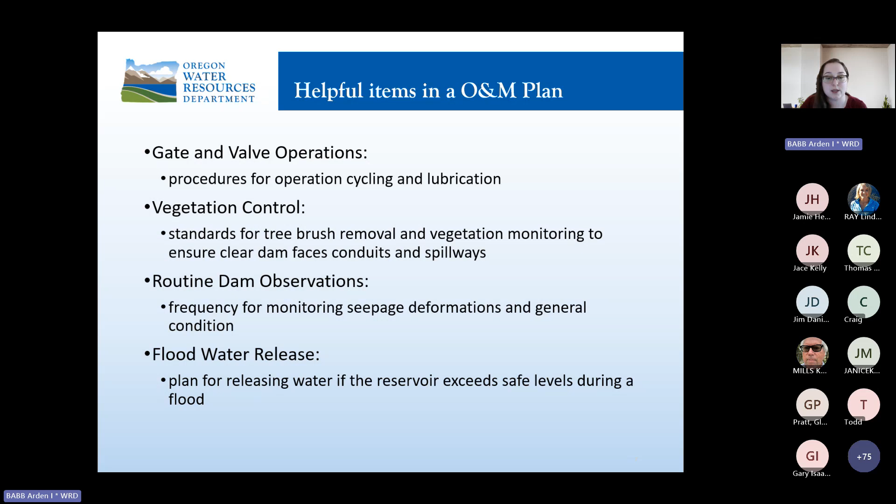You can also include a flood release plan - a plan for releasing water if the reservoir levels exceed safe levels. An example of when that might occur would be during a large storm or a flood event. So it's important to be aware of weather conditions that are forecasted to result in these big storms. It's good to always make sure your spillway is clean and not blocked, but especially if you know that there's weather conditions forecasted to bring a lot of rain.

An option potentially would be to open your valves before the storm to lower water levels to help with any inflows that come in. Be aware that water quality standards and other agency requirements need to be followed if we're doing that, and there'll be more discussion of that in later presentations today. You can also consider having engineering analysis done to show when you might want to open those valves, for example, if you're expected to get a certain depth of rain in a period of time.

The other important thing to remember is your flashboards. If your dam has them, they need to be out when it's specified in your certificate. If there's no specification on that time, most of the time that'll typically be the end of October to the beginning of April when most of those larger storms would be coming through the area.

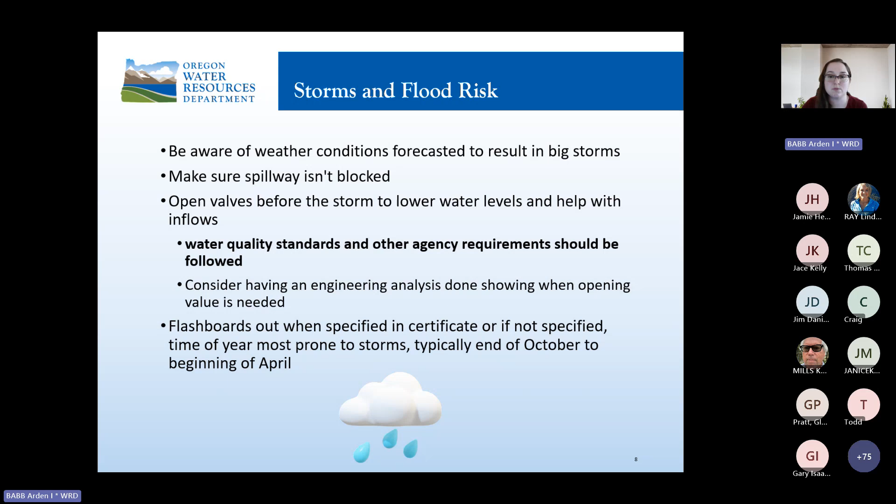So after an earthquake, when it's absolutely safe to do so, be sure to check for any settlement or new seepage that might have occurred on the dam. Additional tremors are likely, so always use caution - after the main earthquake, there could be smaller shakes. And then you want to continue checking for any of this damage in the following couple days. Settlement might become more apparent at that point, or additional seepage may be showing itself.

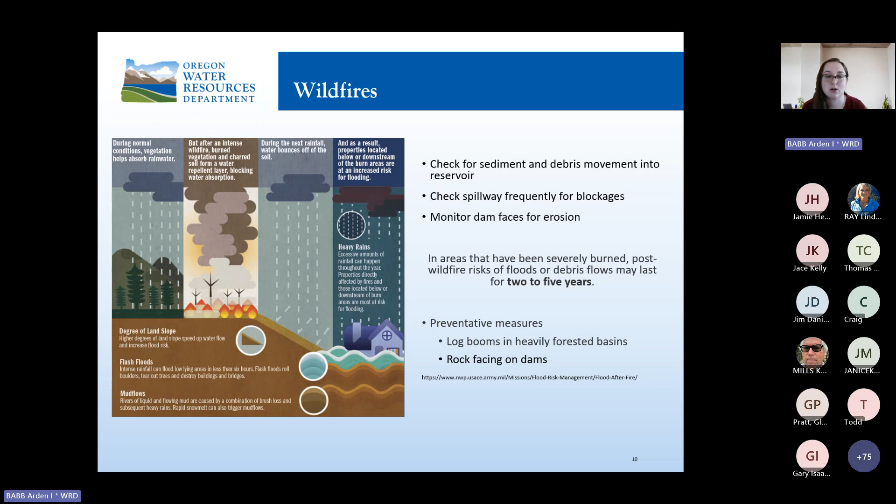So a few ways that can be helpful in planning for these situations. Emergency action plans are documents that assist owners, operators, and local emergency managers with actions to ensure safety in the event of a potential or actual dam failure. These are required for all high hazard dams, and all of our high hazard dams currently have one that is updated periodically. Significant and low hazard dams can have one, and we highly encourage that they do.

We have a template available on our website that makes it really easy. Most of the blanket information is there, and you can just input information relevant to your dam. These are really great to have because there's a lot of information that can help you plan. If something were to occur rapidly, you may not always know the best action to take, and so these are some of the elements that can be in an EAP to help you.

They can help you identify what an emergency condition is. It can also help you determine the severity of that condition. You can have a list of contacts. That could be local contacts for the dam owners and operators. That could also include us at OWRD. It could be the local emergency management group, and that's just a running list of communication that you can easily access in any event.

It can also include steps to reduce dam failures or to mitigate its impact. Typically, they'll have maps that show the inundation zone, so you have an idea of where the water would be going if your dam were to fail, and you can let emergency managers know that that's the location where the water will be going. These are usually shared with the local emergency management office, so typically they will have a copy of it as well. And then it also goes through steps for ending the emergency, so who needs to be contacted, what needs to be done moving forward.

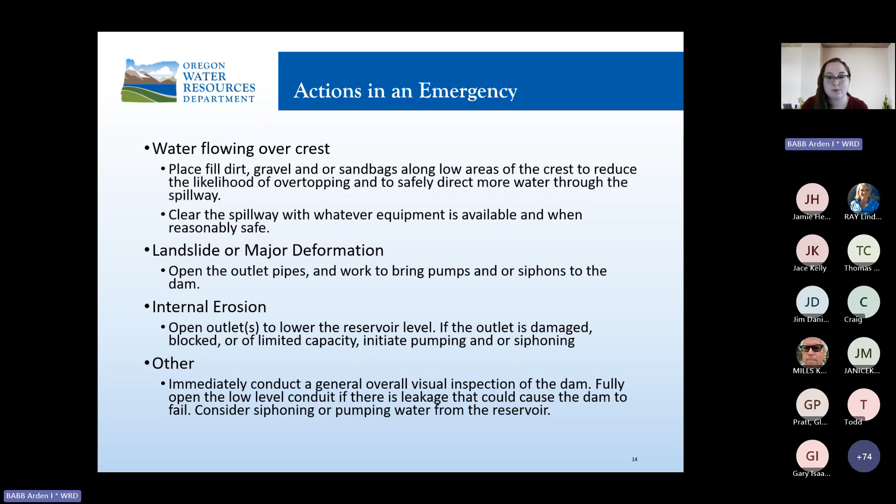If there's other issues, you just want to conduct a visual inspection of the dam, fully open the low-level conduit if there's any leakage that could cause the dam to fail, and then again, consider pumping or siphoning from the reservoir. And I think that pretty well wraps it up. I'll open it to any questions. If there were any while I was working, I can answer those as well, or defer them to Tony.